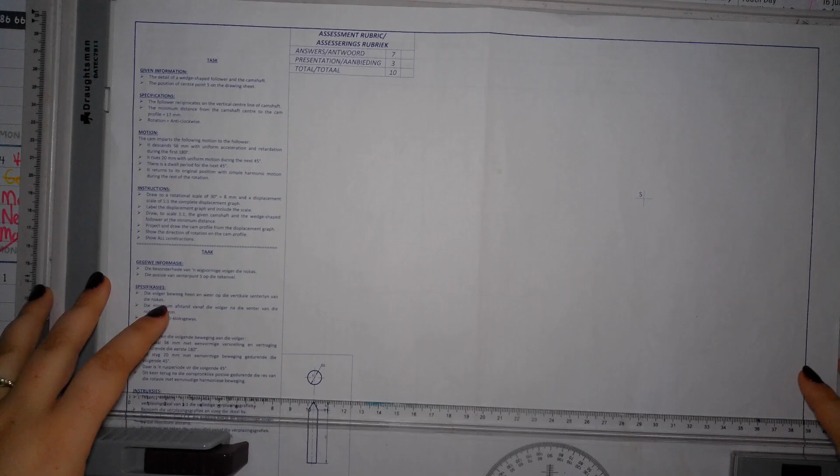So far we've done mechanical development, and now we're going to do this one. Then there are 2 things from a new topic that I should still teach you.

That's why my grey hair ages me by 20 years.

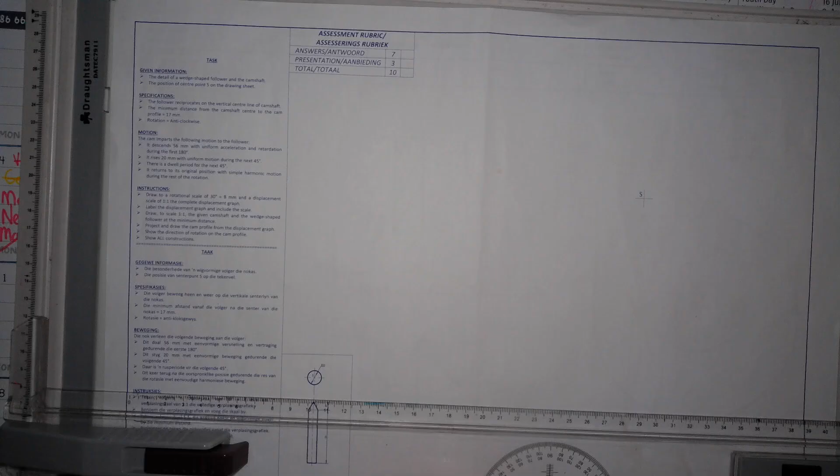We need to draw, you need to have your things here, we need to finish this today. So specifications means you need to listen, you need to focus, and you need to draw.

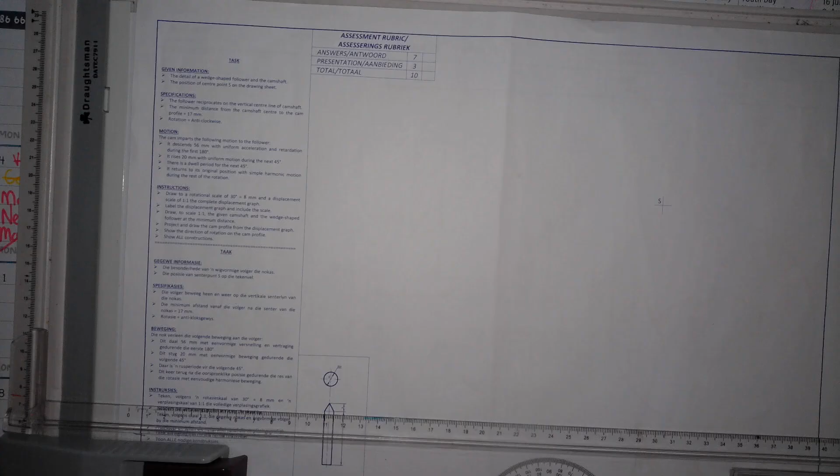Specifications: the follower reciprocates on the vertical center line of the camshaft, so it's going to be over there. Then the minimum distance from the camshaft center to the cam profile is 17.

Rotation is anti-clockwise. So in which direction do we number? Clockwise. Okay, motion I'll go over in a minute.

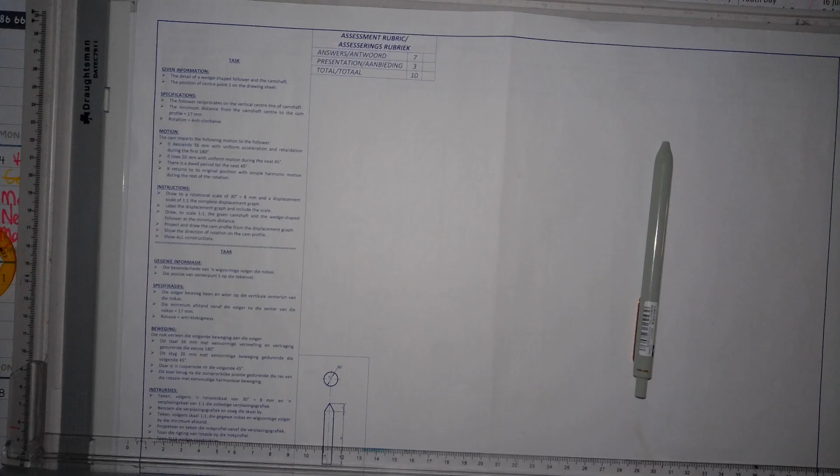Instructions: draw to a rotational scale of 30 degrees equal to 8 millimeters, and a displacement scale of 1 to 1. Complete the displacement graph, label it and include the scale. Draw to scale 1 to 1 the given camshaft and the wedge shaped follower. At the minimum distance, project and draw the cam profile from the displacement graph and show all directions of rotation on the cam profile. Show all constructions.

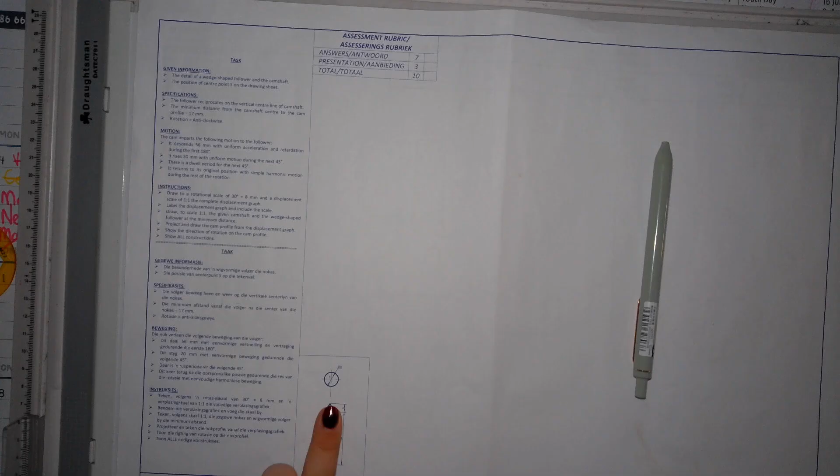So you'll see your follower is at the bottom this time. I'm going to draw it as I see it here.

My camshaft is 14 in diameter. Thank you very much.

You need to use a circle that is radius 7. 100, 120. I am cheating because I can - I'm using 15 because I don't have a 14.

The camshaft also needs to be hatched. 14, radius 7.

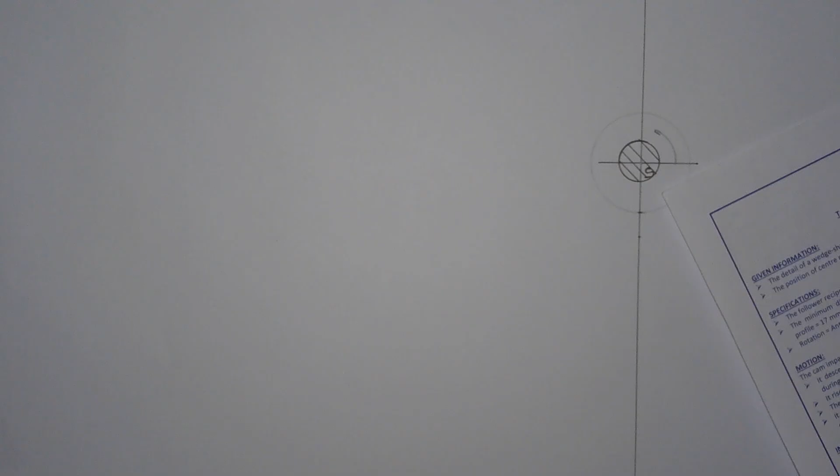Your instruction says this wedge shaped follower is 8 millimeters, so from the circle I'm going to measure 8. This is the minimum size that it can be, the smallest piece. So from here it's 8 down.

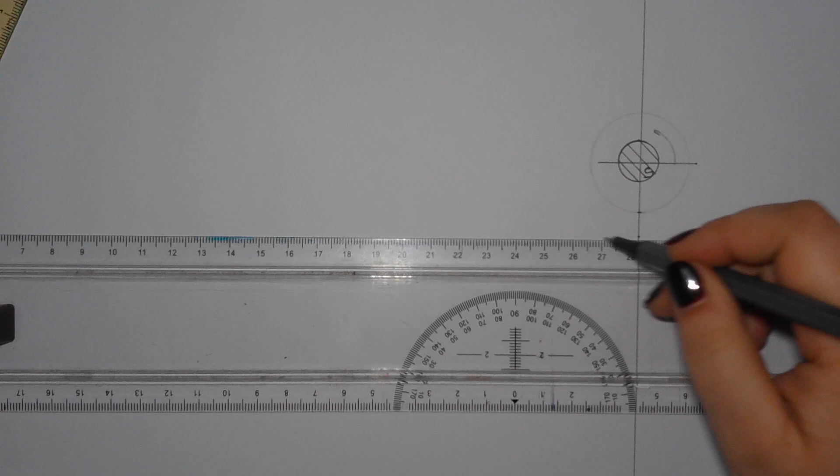Then it goes down 56, from the 8.

I think you saw what happened in the morning, the fights and stuff.

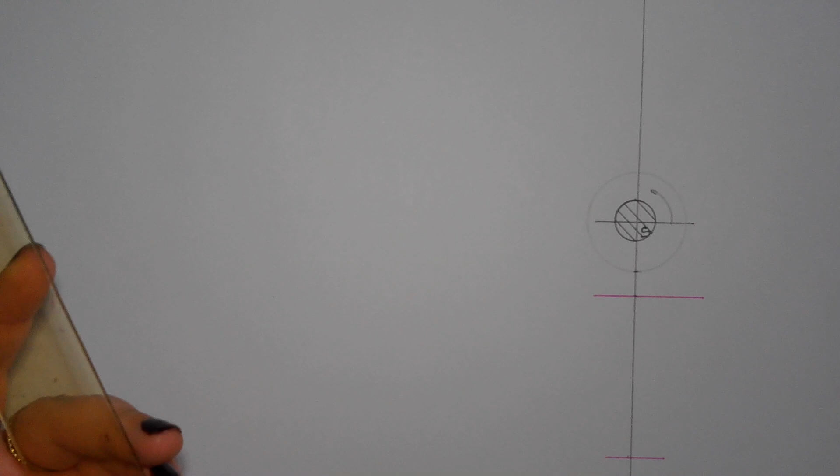So from here it's 17, 8, 56.

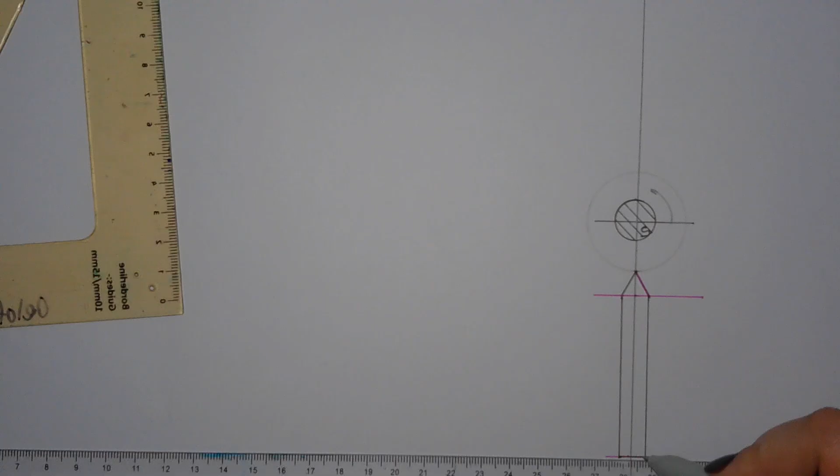They don't specify the width. Let me just see something - which means that if I just take this 60 degrees from where the wedge follower starts, it will give me the width. Just from the 17 to the 8, and that is then my width.

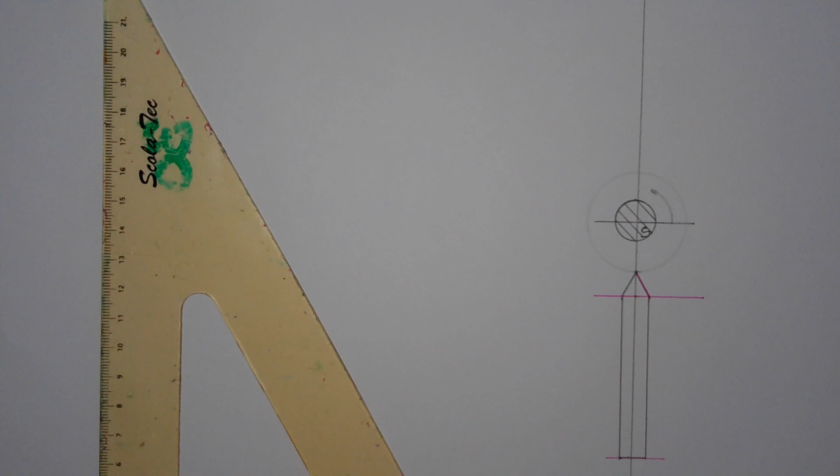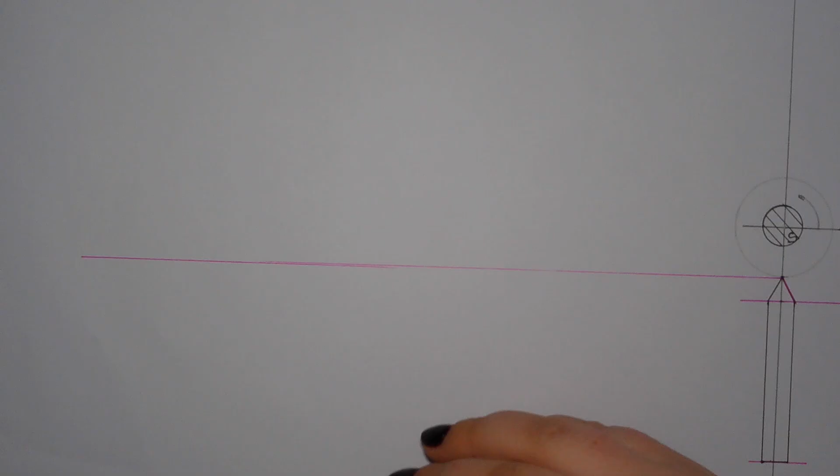Then to draw our displacement graph. Our follower is at the bottom, so basically our graph is going to be upside down, but the step still stays the same.

It says in your instructions that 30 degrees is equal to 8 millimeters, so we need 12 times 8 millimeters. What's 8 times 12? 96.

Anywhere on the left where you feel you will have enough space to still draw your cam. It's 8, 16, 24, 32, 40, 48, 56, 64, 72 - okay, the rest I have.

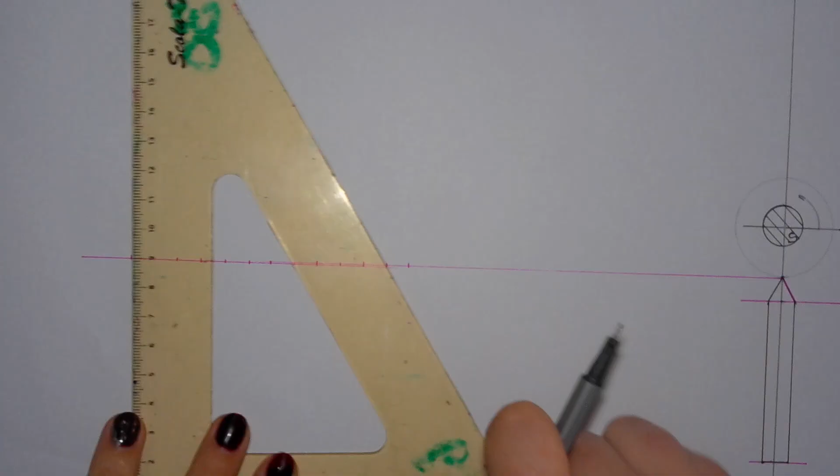What's the width for the roll? If you just put your 60 degree until it touches the line, that's your line.

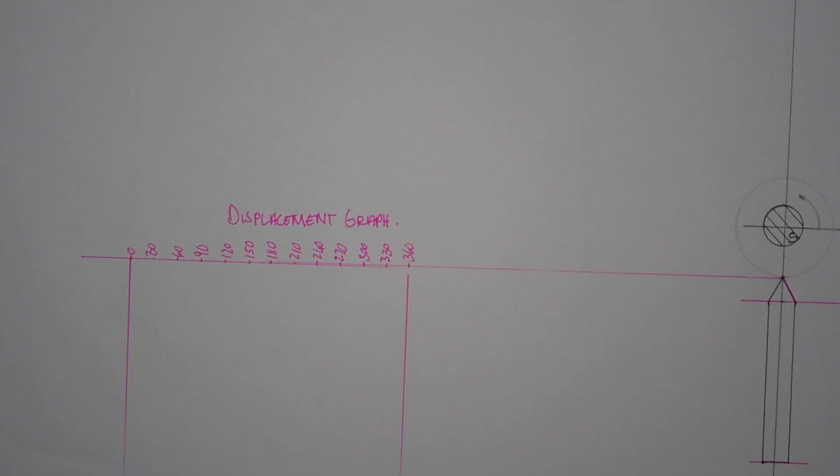And I have evidence for you on recording. The what? Zoom in.

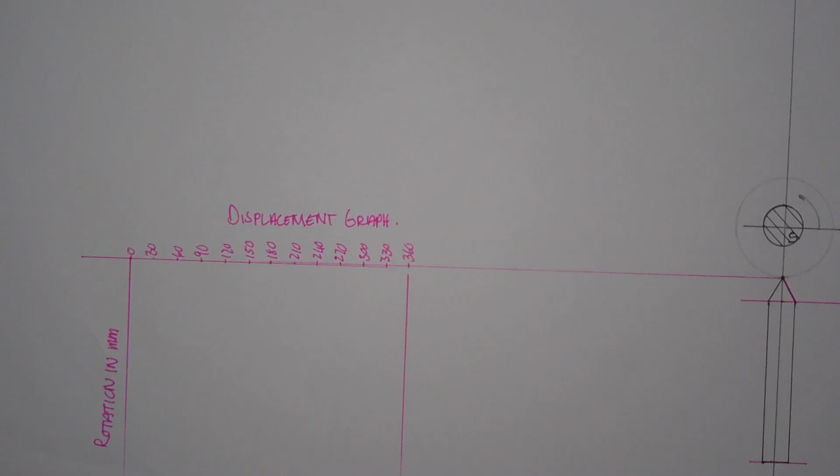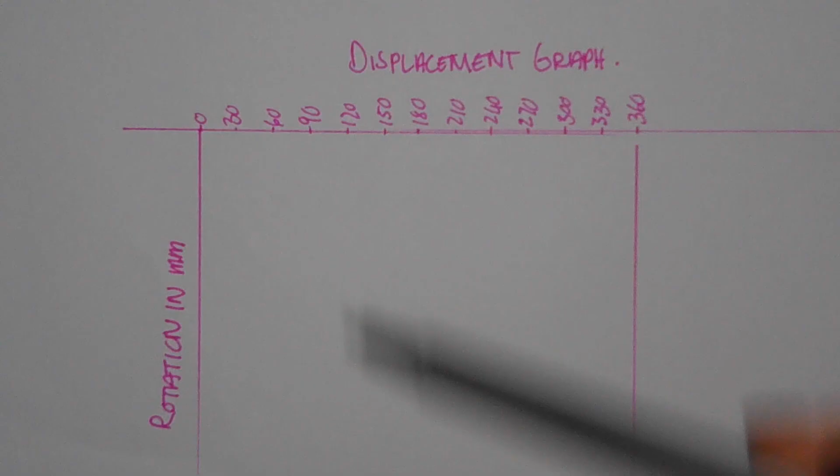Okay, so I am labeling displacement graph, rotation in millimeters, and as soon as I have the height, I'll be able to label the bottom. I also labeled my cam profile.

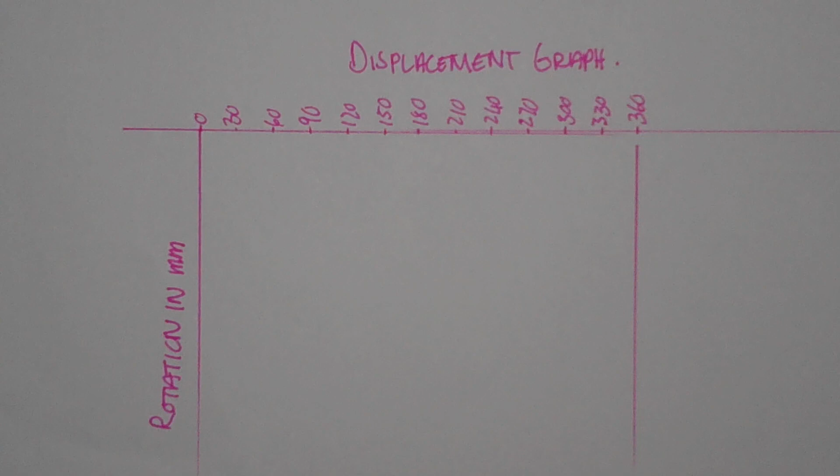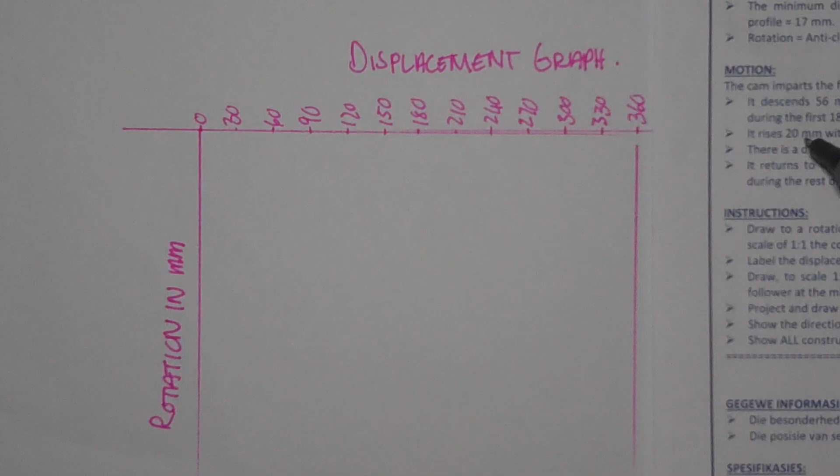Okay, looking at the instructions, it says it descends 56 millimeters, then it rises 20, so it goes down 56, 20, then there's a dwell period, then it returns. So 56 is our longest line.

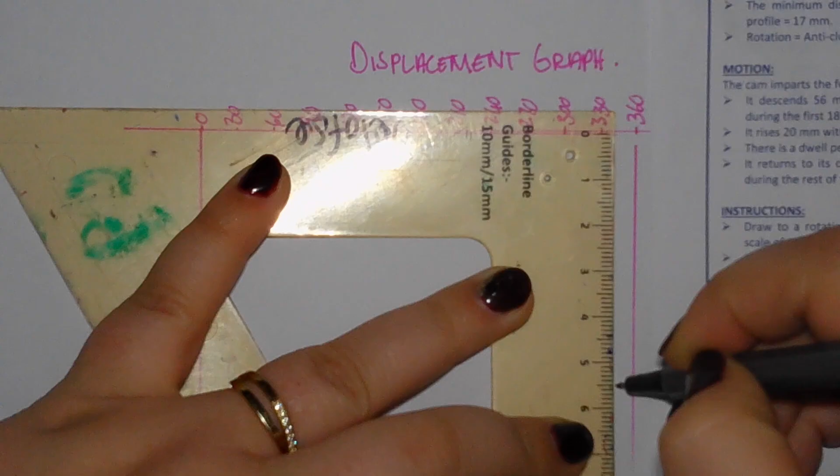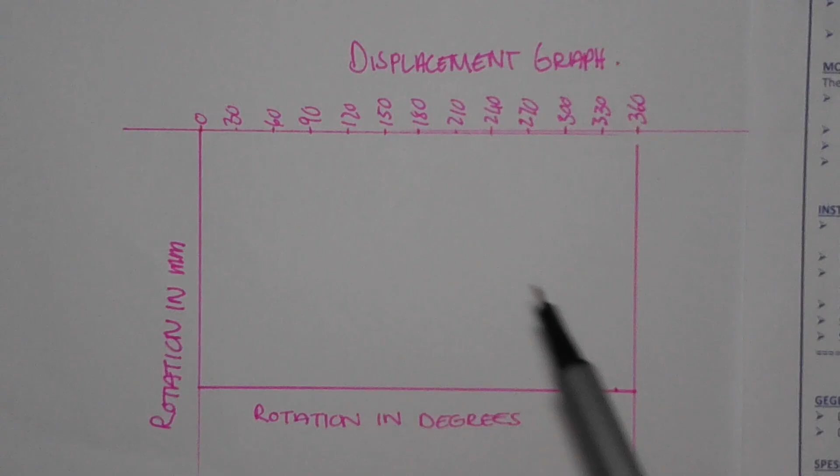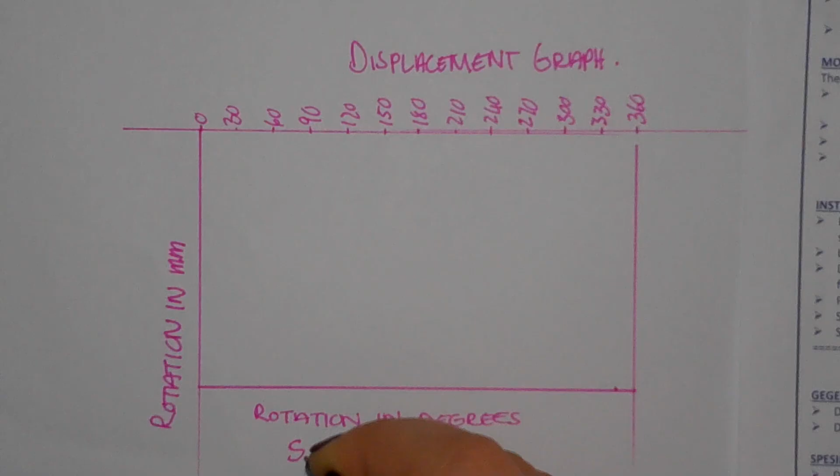I'm also lost. Yeah. In life. Okay. We are found.

It needs to be 360. You need one for 0, one for 360. 8 millimeters. Oh, okay.

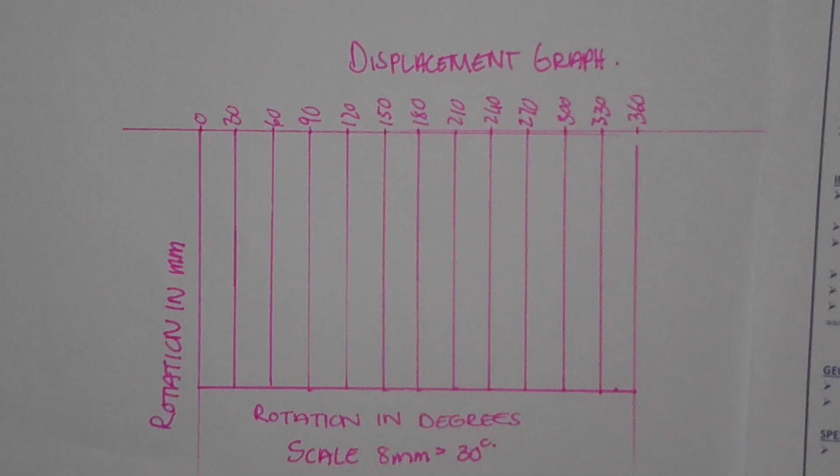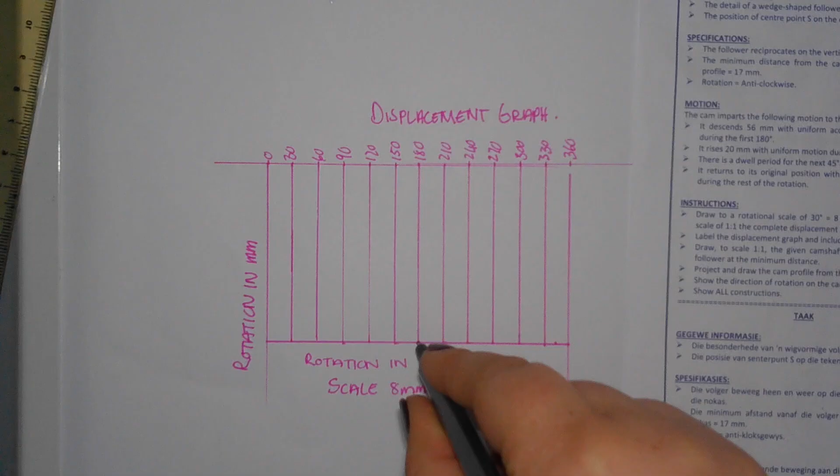Okay, can I continue to do the graph? Okay, so it descends 56 with a uniform acceleration and retardation during the first 180. So by 180, it needs to be by this point. So we will need to... Sorry? 56. We will need to apply the retardation and acceleration process in this space.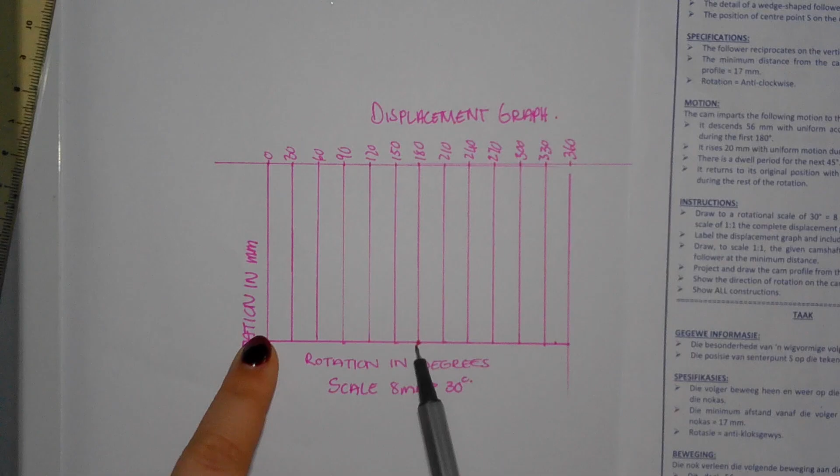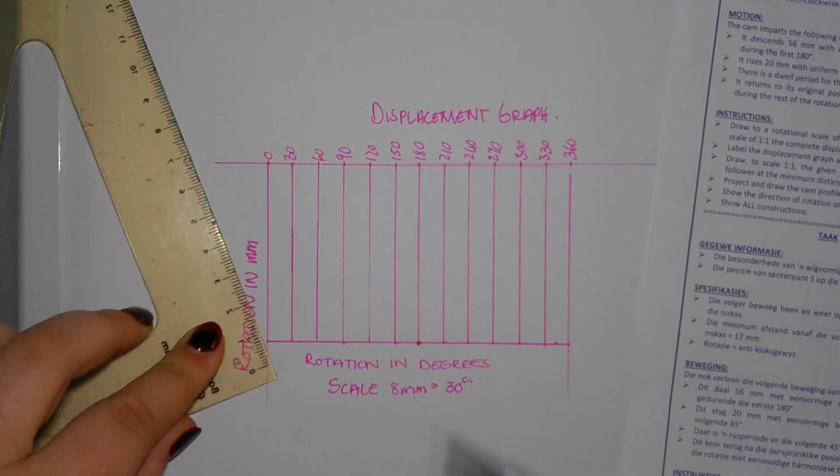So we have 1, 2, 3, 4, 5, 6 slots. 6 from 0 to 180. Which means I need to divide this into 6 equal pieces. So I'm drawing a line that is any length, any degree. And I'm going to divide it into 6 equal pieces. I'm using a centimeter. 1, 2, 3, 4, 5, 6. Six. Any degree, any length, 6 equal pieces.

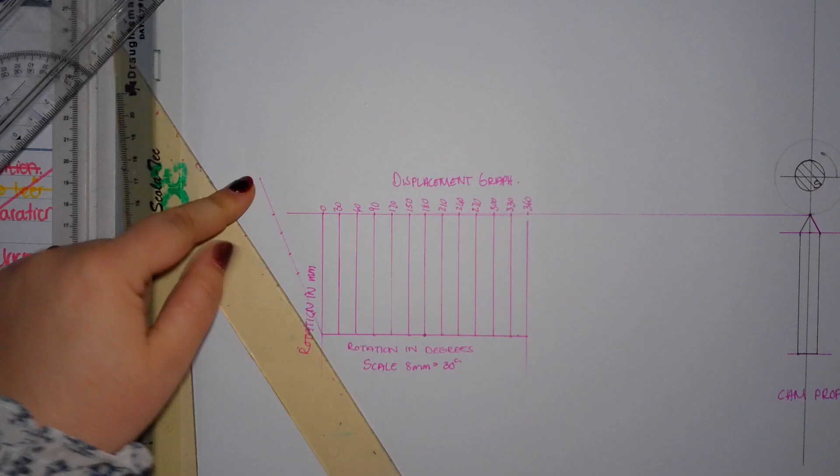Yeah. Any degree, any length, then it's 6 equal pieces. Anyway. Okay, then I'm lining the last piece up with my 0 corner. Putting another ruler at the bottom of my triangle. And I'm moving it so that I will have parallel lines.

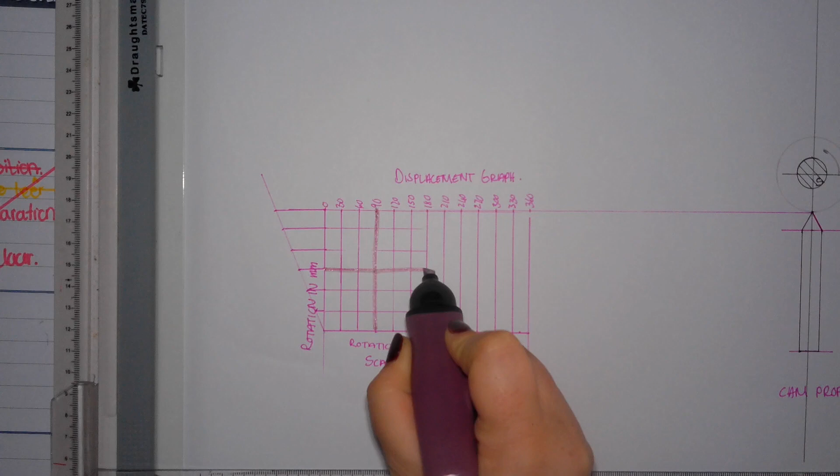Okay, then I'm going to look at this middle piece. This will be my guideline. It's up to 180. All of it. Have you divided this into 6 equal pieces? No, because I don't know where they come from.

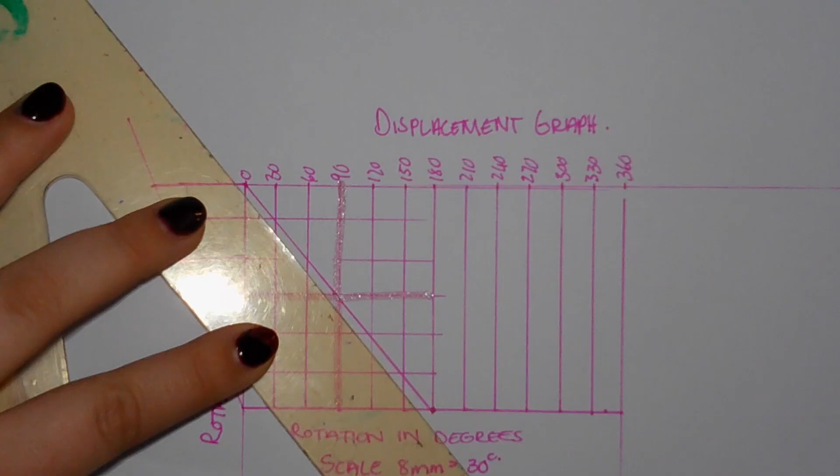If you want to, you can draw a straight line through. So we can go from 0 straight to 180. Okay? Then every spot in between, I'm going to connect 0 with that as well. Just in the first quarter. So I'm just drawing a line from 0 to each line. Then I needed to end here. I already have this line. I'm going to do the same for the bottom.

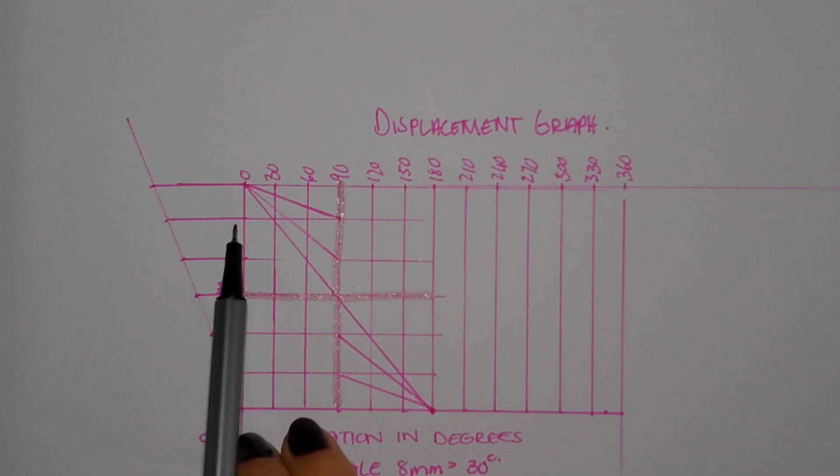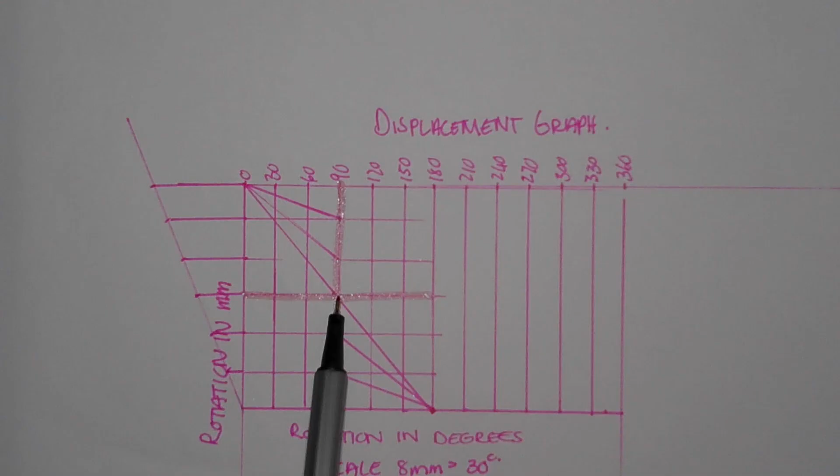We didn't finish the one last time. We ended in the middle. Yes. It's just turned. Upside down. So, do you have these lines upside? From the middle. I needed to start here, so it's going to accelerate up to there, and then it's going to just slow down. So for the acceleration, I'm just connecting from where it needs to start to where it needs to go. Same. Yes.

Okay, then, need to quickly focus. Focus. So when I'm plotting my points, I'm going to start here by 0. I'm just going to get a darker marker. So this is where I'm starting. Then I'm going to move to 30 and where it crosses the first line. So this is my next point. Then for the 60, I'm going to where it crosses the second line. So I'm moving one line up, one line down the whole time.

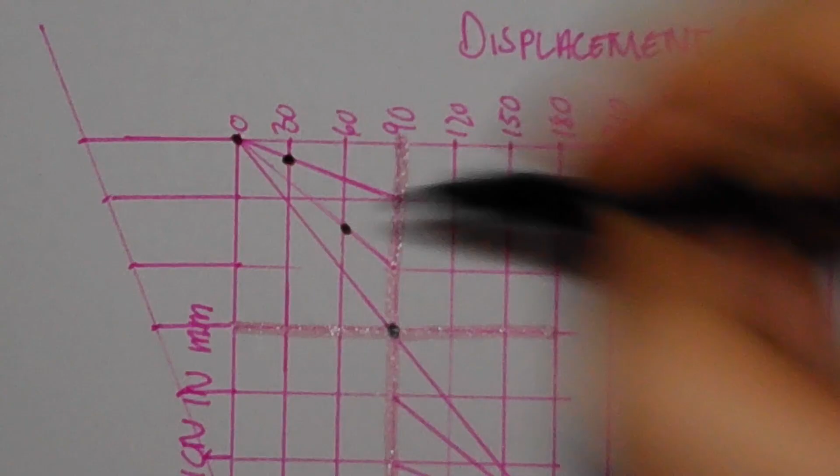So from 0 it goes to 30, and then where it meets the first line. From 60, where it meets the second line. 90 will be in the middle. So I'm just showing the first section. Freehand. Same with the bottom. It needs to end here. So I'm going to go to 150 and where it starts.

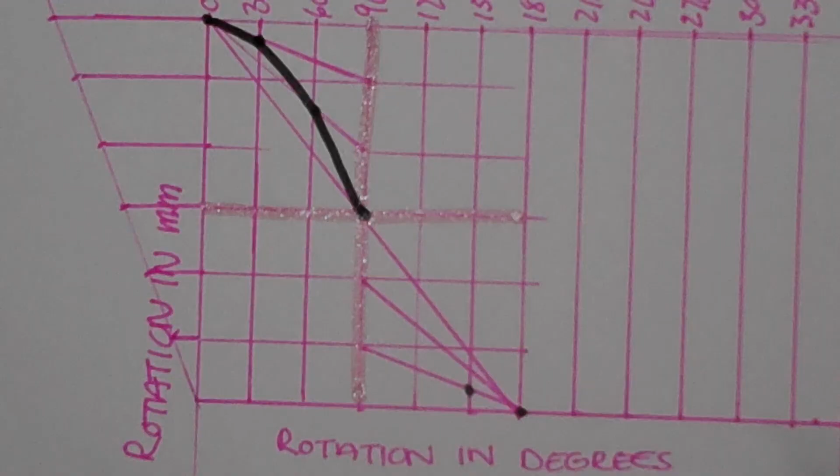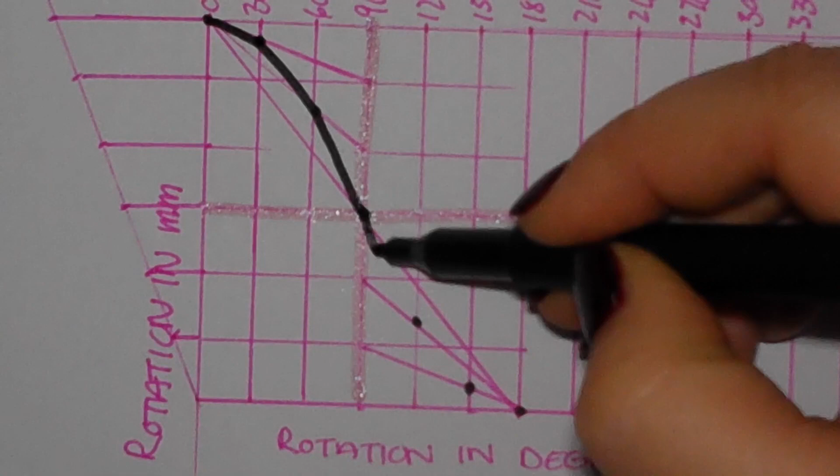So where's the first line? And does it change? Does the technique change? No. It will always remain like this. Always the same. Then 120, second line, and then 90 will be in the middle. So does one line get plotted twice? Yeah, 90 does.